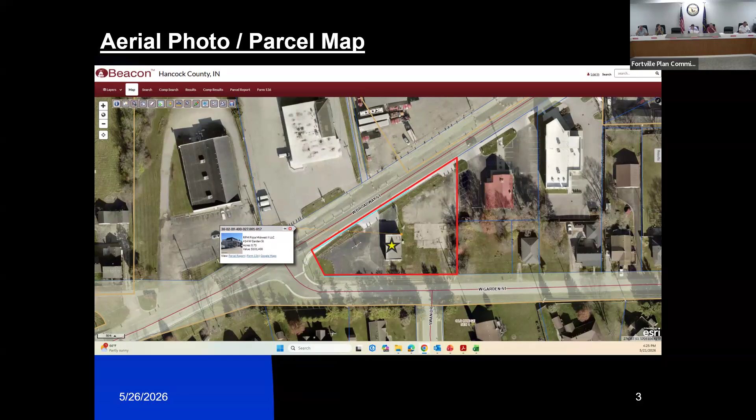In terms of the staff review analysis, the typical review items on the site plan that we look at for the zoning ordinance should be noted that this is within the Broadway/Main overlay of town.

The first item we look at is access and circulation. Driveway access to Broadway and Garden are both existing and will remain unchanged. Chairback curbs will be installed around a new and improved parking lot and drive-through lane, and the existing posts around that parking lot will be removed.

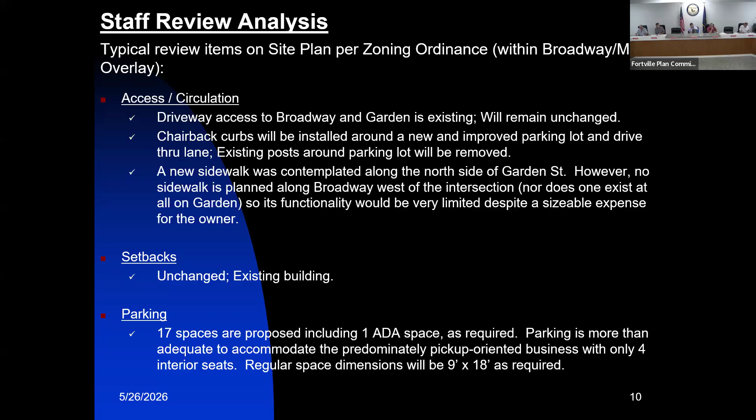For landscaping and screening, they will be adding juniper bushes for screening around the parking area and the dumpster enclosure. Landscaping will be added in an island to be created near the drive-through lane north of the building, with river rock and shrubs. Juniper bushes will also be added around a new concrete patio area near Broadway.

The dumpster will be screened with a wall and an opaque gate. And the derelict lot that is part of this property, that existing rubble that you see, will be removed and grass will be planted.

In terms of drainage on this property, improvements will be made to the parking lot drainage. There's no on-site detention that would be provided. It's not required, since it's under an acre in size and it's a minimal amount of new pavement area that would be added to the project.

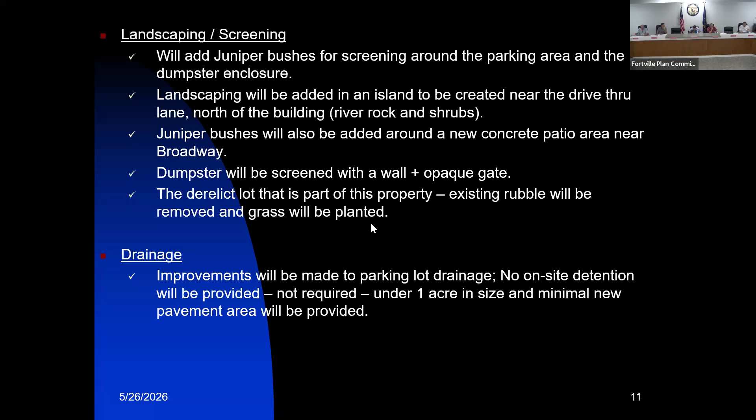So they'll add glass garage doors, and they'll have gooseneck lighting fixtures above those garage doors. That retro parking lot fixture you see out in front would be relocated to the point and would have LED fixtures, and that would be used to illuminate the new sign. All lighting will be shielded and will point downward.

They're also doing a curved metal awning around the building, which kind of emulates that architectural style of a gas station from the 50s. And then they'll carry a red stripe all the way around the building at that point, again playing to that aesthetic.

They will be using EIFS where the black aluminum panels exist now, but the EIFS will be scored to match the current style of those panels. And then the EIFS and the existing cinder block will be painted white.

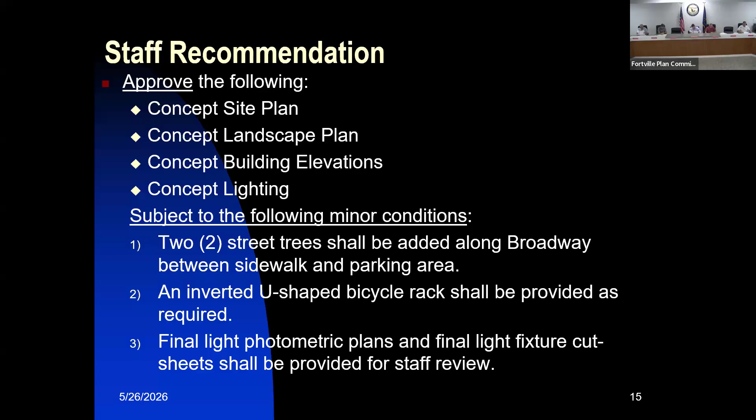So with that, if you have any questions, I'd be more than happy to address those. And representatives from the franchisee are here as well. Thank you.

Thank you, Adam. Appreciate that overview and report. Any questions for Adam at this time?

Adam, can you point out the proposed patio? Yes, it would be located right here. And will there be seating there? Yes, I believe so.

Sure, I like that. The original idea was they were going to put it in this area. So I said to him, what if we were to put it closer to Broadway, so it's a little more pleasant rather than being right by the drive-through lane there. These symbols you see here would be the juniper bushes that would provide additional screening in that area.

Is the drive-through lane really a drive-through, like you can pick up? We'll have time in the agenda for the petitioner and plenty of questions. Sorry, I'm getting ahead of myself. Not at all, I want to make sure we catch it.

Any other questions for Adam? Adam, on this visual here, where are those additional trees you're requesting? I'd say probably one in this area and then one over here, to match the aesthetic of the remainder of the block. The idea is just to have some additional tree canopy over time along Broadway.

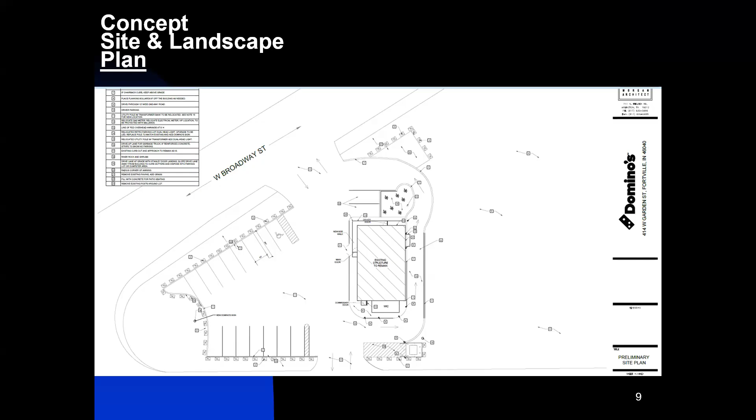Thank you. And since they have the space to do it, as you know, sometimes along Broadway there's just not a lot of space to do that, but here there should be.

Adam, would you want to add trees on the other side of the entrance as well? Oh, over here? Yeah, it's up to you. Maybe if they're amenable, putting one more over here, maybe two over here and one near the patio. It may be premature since they'll come up, but in the derelict lot, I know we're taking everything out, but I'd like to see if they're amenable to putting 3 or 4 trees in what will be an empty grassy space.

Unless they're planning on doing something with the lot differently. I mean, it's certainly up to them. My thought would be I believe the plan is to try to sell that piece for development, so they certainly could, but if it ends up getting redeveloped, the trees might need to be removed. But lastly, from a planning perspective, I think it's really important they get rid of the rubble that's there, which they've committed to doing, cleaning that up, just so it's a nice grassy area that is primed for future development.

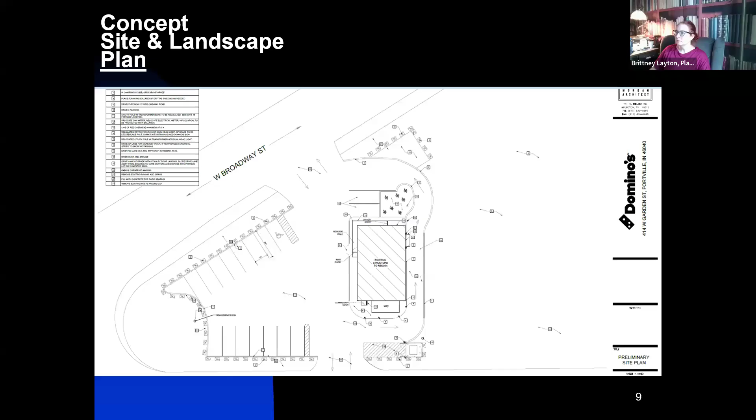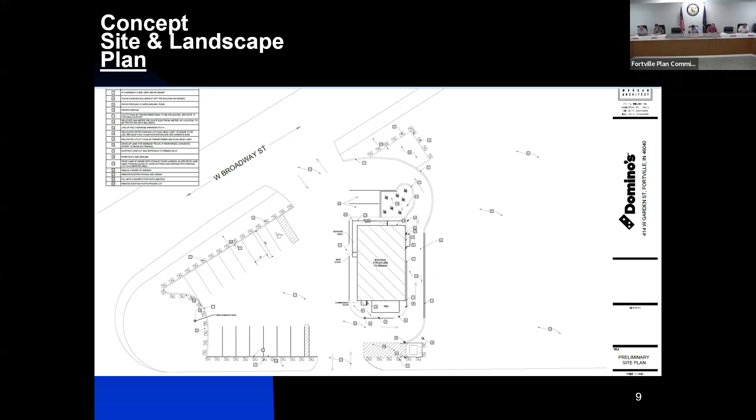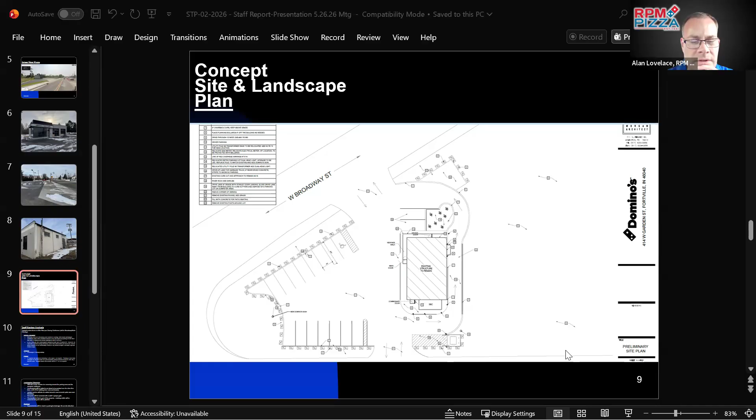I think, just to follow up on the sidewalk on the Garden Street side, I think what I heard was that we're going to go back and discuss that, Adam, because we're also trying to understand the length of it. Does it need to go to the edge of the lot that will be cleared? And I don't know that it needs to be a sidewalk. I'm amenable to whatever town staff thinks, like the asphalt path we have in other places in town, if that's easier.

Yeah, it might bring some more business. And it provides connectivity to the other sidewalk system in town there. It might also cut down on folks cutting through the lots.

That's an important one to me. I don't know about the rest of the commission, but it's on my list. I don't know that it needs to be a concrete sidewalk. Whatever town staff thinks would be best, would look best, or would be easiest, I'm okay with, as long as there's connectivity there. And if you notice, the drive connection to that addition is on the empty lot.

And granted, their sidewalk is just short, I noticed. Because there was no connectivity at that time. Correct. So it could be provided eventually by the town.

So for it to be discussed, now would be a good time, because if it's made a condition, how would you want to handle that, Adam? And if a sidewalk or path is not provided, that would be an issue.

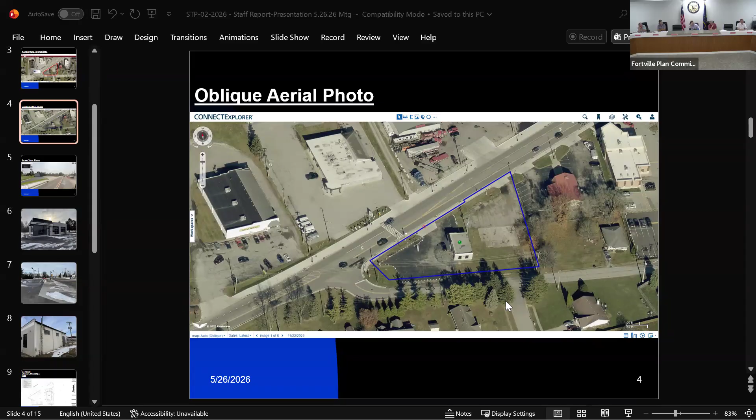I suppose the other option, if it was a requirement to put it in, is that the petitioner could seek additional funding from the RDC to do that, since it's a public improvement. That would be up to them to decide if they wanted to chip in some additional funds. I think it would be a good use of public dollars since it directly benefits the public, but that would be up to them.

So I have a question. Having a sidewalk there wrapping around is an excellent idea. I just want to be cognizant of the cost to the petitioner for extra work they're perhaps not expecting, and make sure we're doing this hand in hand with the upcoming business so it's not a conflict point in the future.

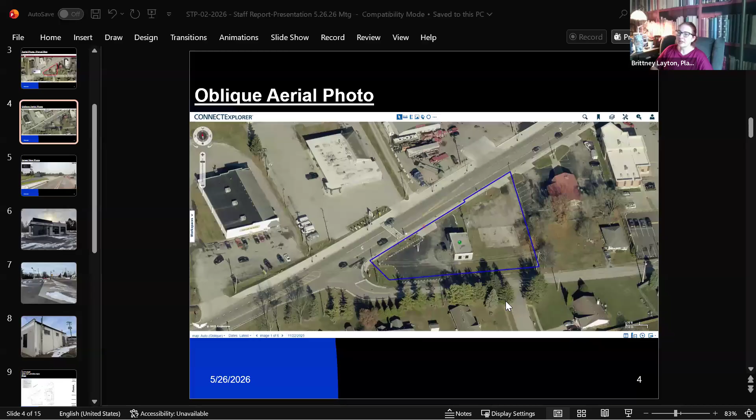Oh, the other thing I wanted to mention when we looked at the sidewalk is there's a pole over here, so you'd have to work around that. It could probably be done. We've got a new light pole over here, then there's an existing power pole over here, so you'd have to weave the sidewalk through.

The other issue too, not that it's insurmountable, but another factor that could increase cost, is that if we put in a sidewalk, it's pretty tight between the parking area and the asphalt on Garden. But aren't they ripping that out and redoing the parking lot? They are, yeah. Yeah, that's a good point.

You could gain a little bit of square footage there. But anyway, if you're going to put in a sidewalk, does that mean you put in a curb as well? And then what happens to the drainage, the sheet flow drainage on the road? No, that's a good point. We'd have to put in curb and gutter, and so there's a substantial cost there.

It looks like it's crowned and draining to both sides. It stops right there at the corner. So that's why, from a staffer's perspective, I don't disagree at all with the thought process, even if you end up deciding to ultimately make a condition on that.

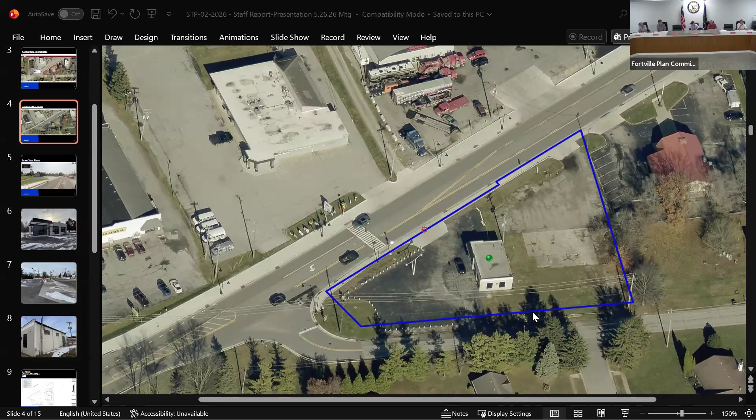So it's certainly up to the board. Is there a mechanism, because there's going to be substantial cost impact for the RDC to do a side-by-side project here? I would hate to put this all on the applicant, but coming back and doing this later is also going to have an impact on an operating business. So it seems like this would be the right time, if we're going to do the improvement, to do it while they are doing site improvements and not operating. But they shouldn't have to bear the entire cost, particularly if we're talking curb and gutter. It can add up. And if it's utility relocates, is there a mechanism that we could make a recommendation to the RDC for essentially an add-on project to do this at the same time?

I was actually along those lines going to ask, is it possible that we ask the petitioner to leave room to accommodate for that sidewalk for a future improvement project that may be done by INDOT or the town, so that it's already planned for, it's just not being implemented at this time? And then if the RDC deems it reasonable, they could come back in and do it. Because I worry about having to do a hydrological report and all of that.

That's a good point, there's a lot, you're right. Or maybe it's the next time the garden is improved. Next time we come through with it. Well, like we said earlier, renegotiating or discussing again when that empty lot is sold. This is a prominent point in Fortville as you come into town. Oh, for sure, I mean it would only add to the aesthetic, I think.

Can I say something to that, Brittney? I really like the idea, and I don't want to hold up progress, but I like the way you said it, where if we build the asphalt and our parking to the location it is now with those posts gone and those bushes in, then later on if you make an adjustment, we have to move some bushes and cut back our parking lot a little, which is not a problem at all. The question really is, I do think it's better that I'm recommending we proceed as is, but if you come back with those funds, it'd probably be easier for us to just cut out some of that asphalt, move the bushes so that we don't impede progress.

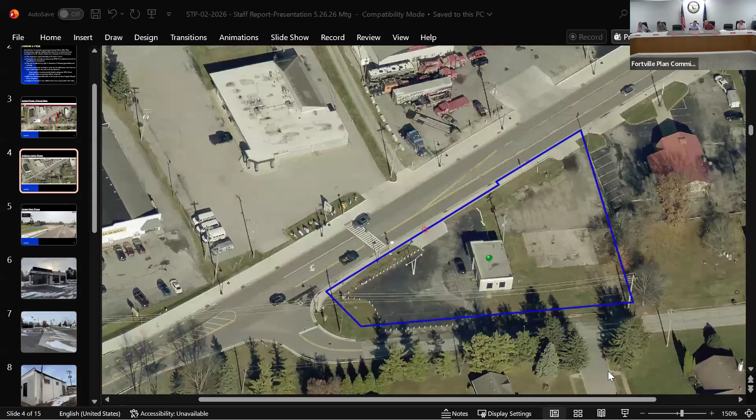That would be on the empty lot, right? Majority of it would be, maybe half and half. It would go in front of the dumpster enclosure and just line up to the entry of Old Bridge and not proceed on the other side of the parking lot to wrap the point.

Yeah, hopefully that makes sense. I'm not a big fan of small sections of sidewalk leading to nowhere. But I guess if we knew there was a plan in the future, near future, to continue it, potentially not at their expense, we could get some of it accomplished at this point. Are there current plans? Is there anything on the horizon for that empty lot? There is not. Nothing yet? Okay, nothing yet.

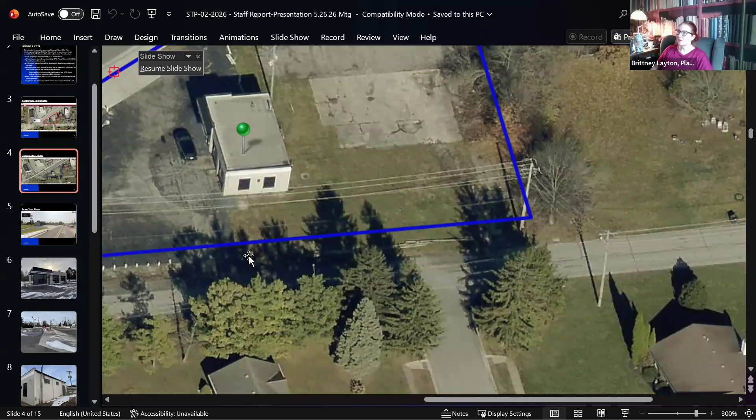Adam, do we do that with the condition because they have to come back to us? I am looking at Google Maps, so correct me if I'm wrong, but along Swan Drive it looks like there's sidewalks on either side. So if we brought the sidewalk down to where it meets the western side of Swan Drive and then provide a crosswalk across, that should connect us to the existing sidewalk along the west side of Swan Drive, if that makes sense. Unless I'm incorrect about the location of their sidewalks.

I was looking at a recent Google map. So if you look, let's see, you see on the screen there? See where the current sidewalk terminates? See where the cursor is?

That way, if there's a potential for future improvements there, they could just readily cross at that intersection along the western side.

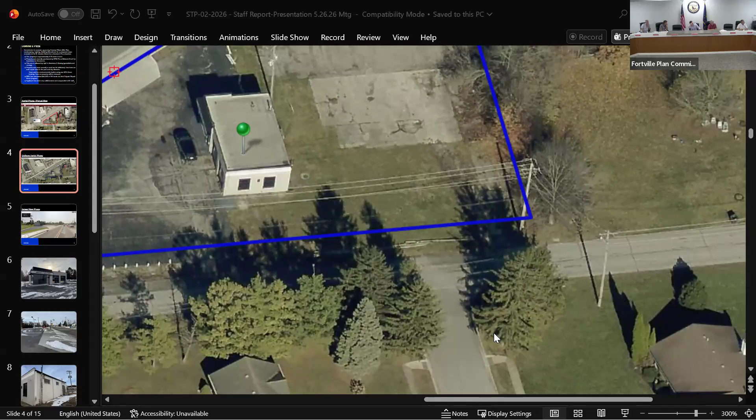Yeah, maybe, going back to your original comment, maybe the idea is, since, let's go back to the site plan here. Maybe the other thing to keep things moving is, since you're going to be reworking the parking lot anyway, I wonder if the parking lot is pulled back. Oh, you have this parking space over here.

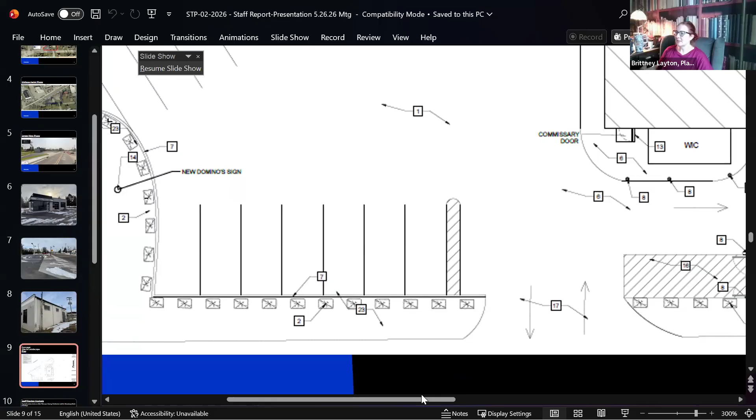I agree with that, I like that. Yes, leave the space there so that if the town puts in a sidewalk, there's enough physical room to do it. That's one way of doing it.

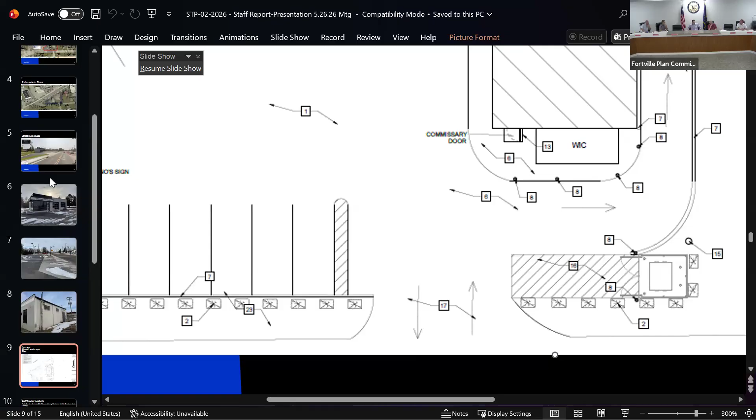Got a question, Adam, maybe for Alex. This is one parcel, correct? This and the empty lot? It's all one parcel. Yes, okay it is. Could this be, I think it might be two, no, it might be technically two underlying parcels that are combined for one tax ID, but here's the boundary of the ownership. This is what they own.

And maybe this is, the condition is attached to the sale or subdivide of that empty lot, and it has to be addressed at that point. It's kind of kicking it down the road, but it can be tied into the sale proceeds. It can be tied in. I mean, it gets accomplished now, what we need to get done now, but I think it's important to tie it into the connectivity, the pedestrian connectivity, and into Old Bridge.

Yeah, but it is across from the empty lot, so maybe we attach the contingency now to that lot, since right now it's all one. Although what becomes contentious then is- And then Robert, you invoked my name, so I'll pipe in. I actually think that makes more sense.

Adam touched on it earlier. If there's a new build, then it would be required, and so that would be the time to make that sidewalk improvement and connectivity. But here's my concern: when the sale happens, it'll be to a different party, and then we would be negotiating a sidewalk install on our owner's property, the one on the point. So if we made it conditional now, would it still carry over upon the sale and transfer of the empty lot?

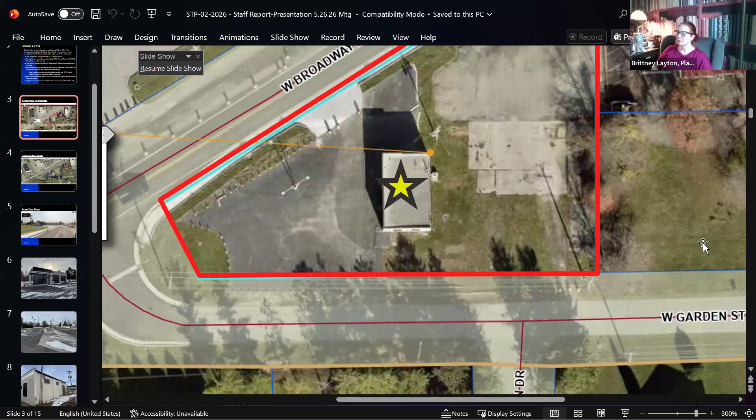On the Swan Drive property there at the end, the sidewalks look like they're probably 50 feet short of the road itself. They feed into the road, correct? That could be a possible RDC or town project as well. Yeah, that would not be a requirement.

No, I'm just wondering if there's a town plan to connect that to the crosswalk. Right now it goes into the... Yeah, there's no town plan to do anything.

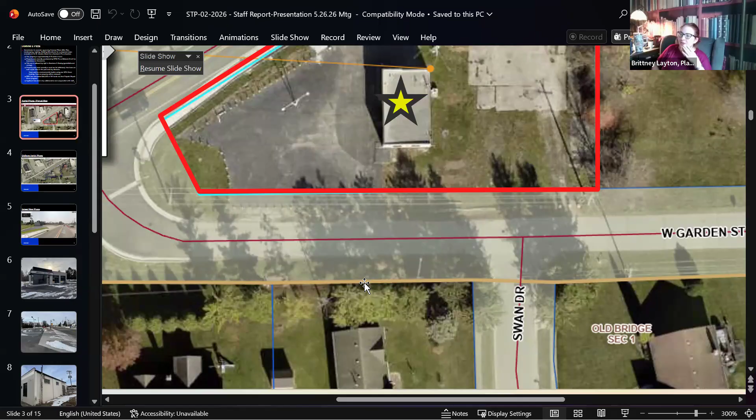Adam, just to bring this up and put it on the record, that is a residential subdivision over there. From my own teenage years, we had a Domino's pizza in our town where I grew up, and it was a frequent spot for teenagers and young adults to hang out and get some late night food while walking around. I think it would be in the town's best interest to consider what improvements could be made on the town's part over at that location.

I agree. Like I said, I think it's a worthwhile town expenditure from TIF funds to do that, but it's up to the RDC to make that decision.

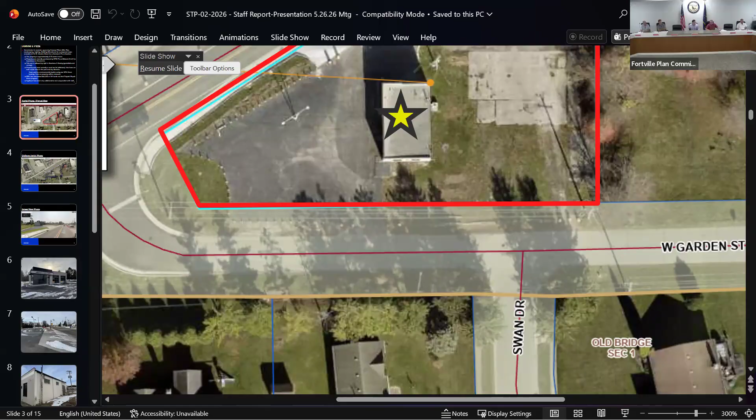Good context, Brittney. Appreciate it. Any other questions, comments, or on the petition at this time? We have time in our agenda for comments. Any to speak? No, no. Okay. Any final comments or discussion needed? Did I cut someone off online? It's just the feedback.

Then I would look for a motion, and these can be broken up or bundled, for approval with conditions or denial of the concept plans, which includes site plan, landscaping, lighting, and building elevations for the proposed remodel of 414 West Garden.

I think I got it down. I got it written out here. Are you ready? Sure. Make a motion to approve the concept site plan, the concept landscape plan, the concept building elevations, concept lighting, subject to the following minor conditions.

One, discussion with town staff and ultimate approval from town staff on the installation of 3 street trees to be added along Broadway between sidewalk and parking area. Two, an inverted U-shaped bicycle rack shall be provided as required. Three, final light photometric plans and final light fixture cut sheets shall be provided for staff review.